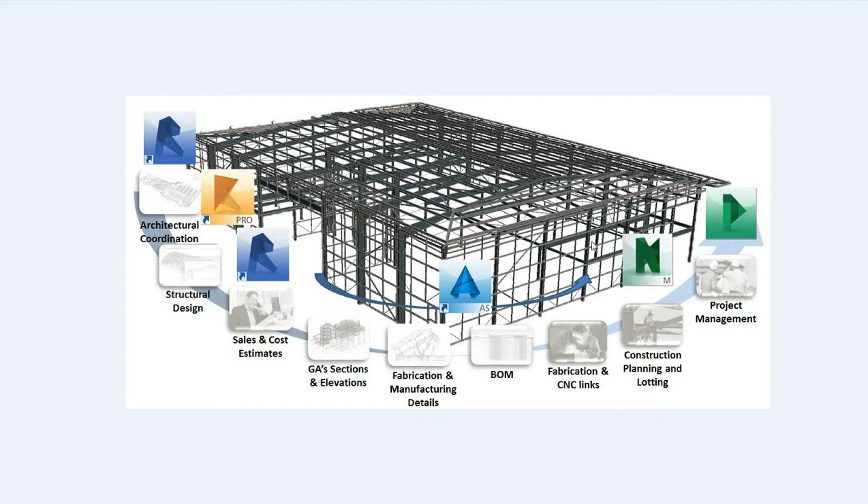If you want to go further, you even can generate a CNC file and send to your CNC machine, and let the machine create the parts for you. Next step, I will show you guys how to model in Advance Steel.

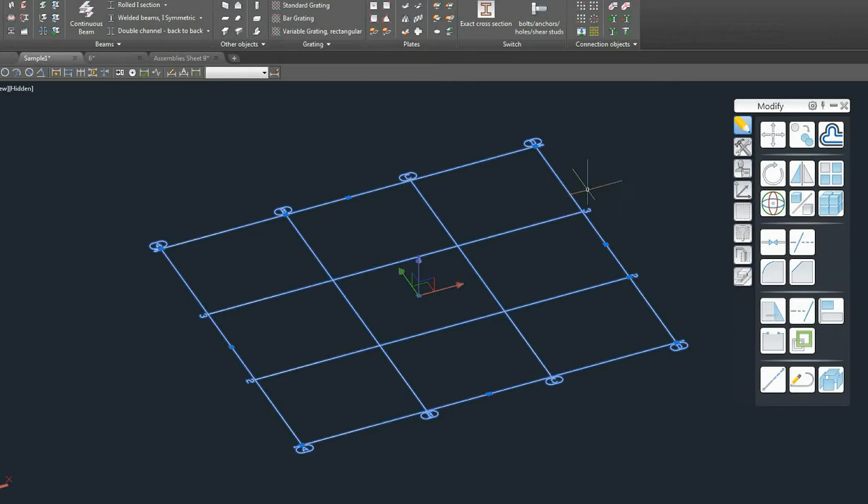At the beginning, I have to show you guys in case someone is really interested in a bayline. You can create baylines here, and of course you can change it, parametric change your bayline. Okay, it's nothing new, but I know probably it's really important to someone.

If someone is really interested, here is the model. A little cute, beautiful structure. If you zoom in, you can see there's some details, right? But how about the bar? The bar looks just like a square bar, right?

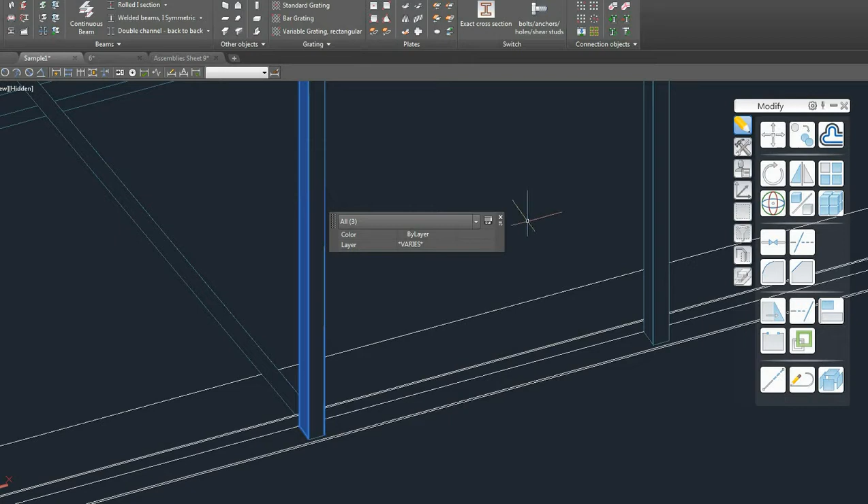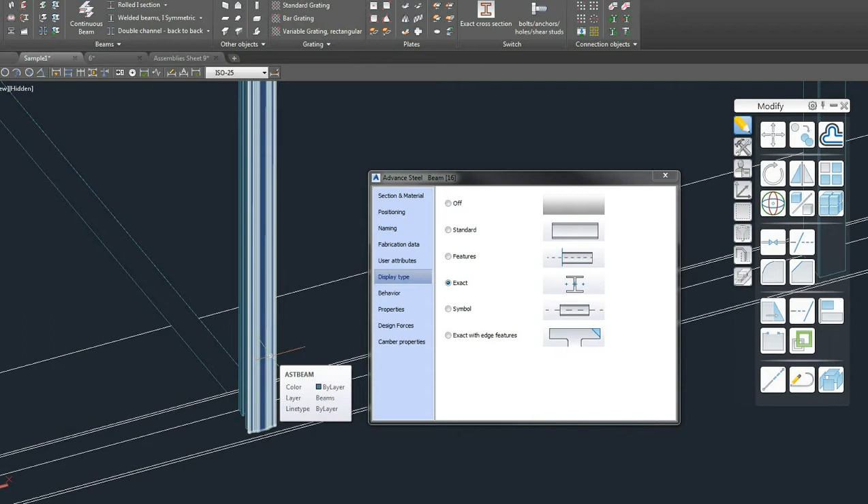Really simple, not really. If you really look into it... let's cancel it. If you really look into it, change the display type, you'll see, so it looks different, right? Also here, you'll see, oh, that's a different glazing cap. Yes, that's a real look. That's exactly the shape of the bar. So that means you have your accuracy, because the software will generate the data from the real shape of the parts, and not just simply a square.

Why do they have the simplified profile look? Because when you try to generate your shop drawing or other engineering drawings, you need a clean, neat drawing. You don't want thousands of complicated lines there. That's the reason. Next, we can take a look.

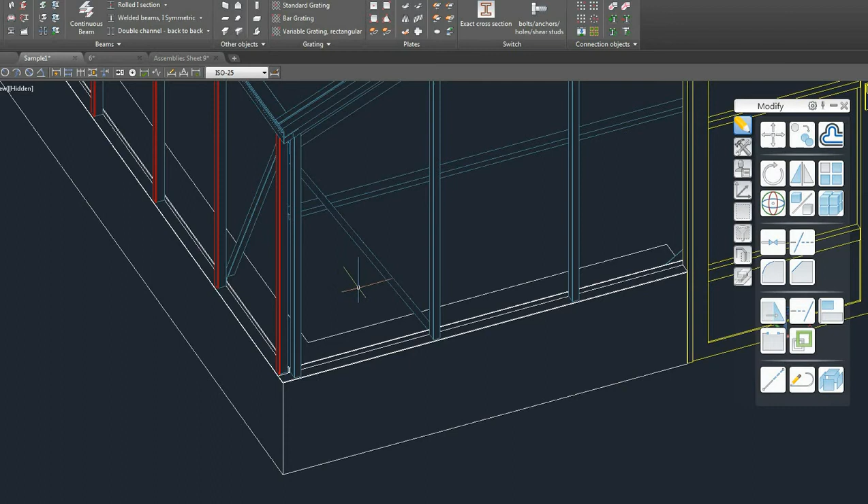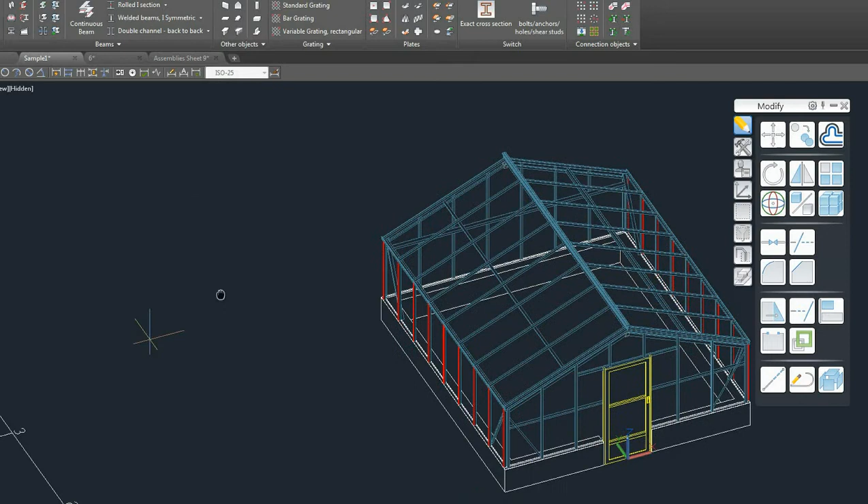How can you typically get your extrusion? You get your 3D model just same as other software. First of all, you need some 2D sketch. There's a library, a lot of big steel libraries. You also can create something by yourself, even not steel, like aluminum or wood, right? So here I just pick one and give the third dimension. Then you get your 3D solid extrusion.

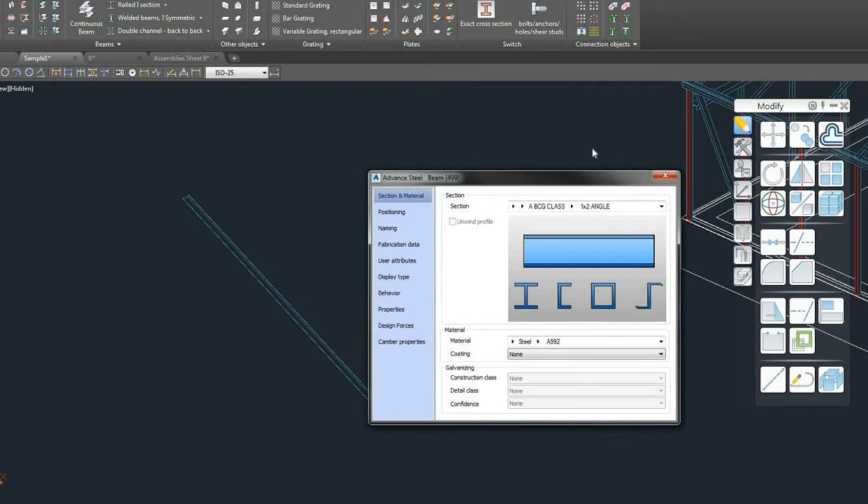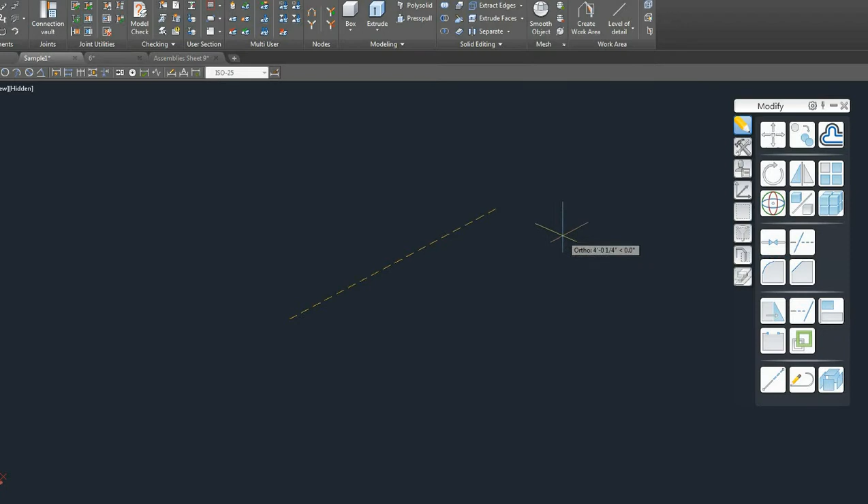Right now, I'm going to create just a gable frame. So right now I'll just give a rough idea to show you guys. That's really big, but anyway, so that's a gable frame, and you can change the section from here. So gable post size, and you can change column size, and there's lots of different settings, such as a span too small - I want bigger, like 10 feet, right?

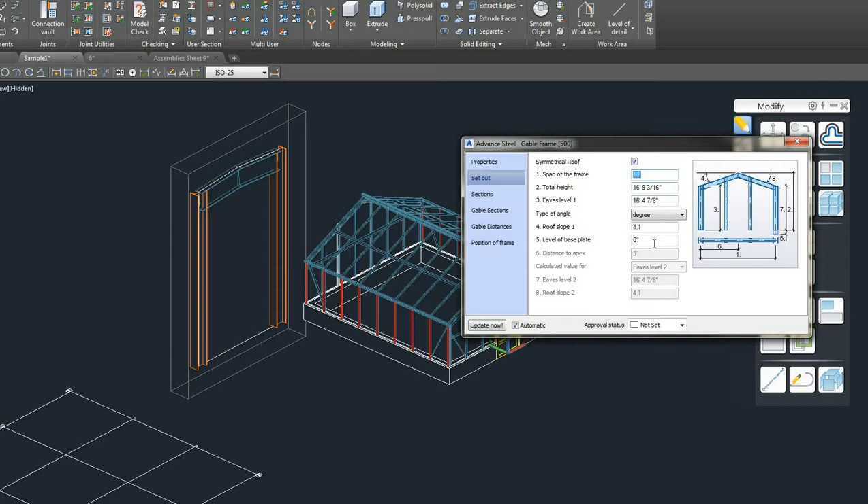You can see here it's dynamically changing. And also you can change the slope, right, the height, whatever you want to change. Right now I'm going to change our base size. So see, you can see here you get more, and here's a number you can control.

So basically it's totally parametric control. It's a smart modeling, it's not just like a vanilla AutoCAD 3D. That's a dumb 3D solid - this one is smarter.

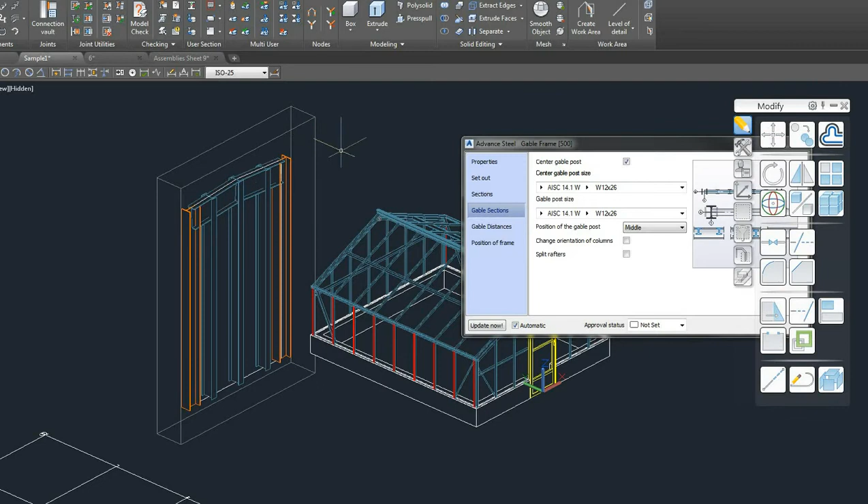After we create this cute structure here, I want to generate some documentation from the model, such as a BOM, or we can call that a cut list. That's very important for your fabrication, right?

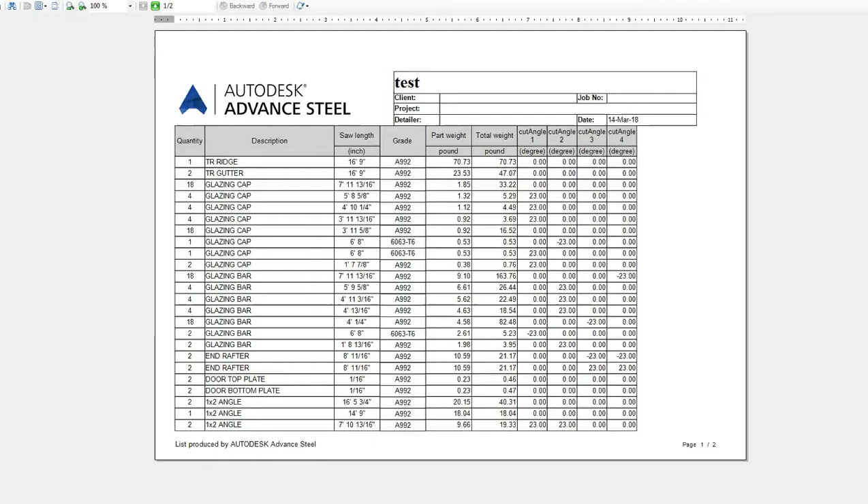So you click the BOM template, and the template comes out. Okay, here's what I create. There's a Z Cut List, and then you will get this. You can tell I put test for the header. There's also everything - basically everything in the table you can modify.

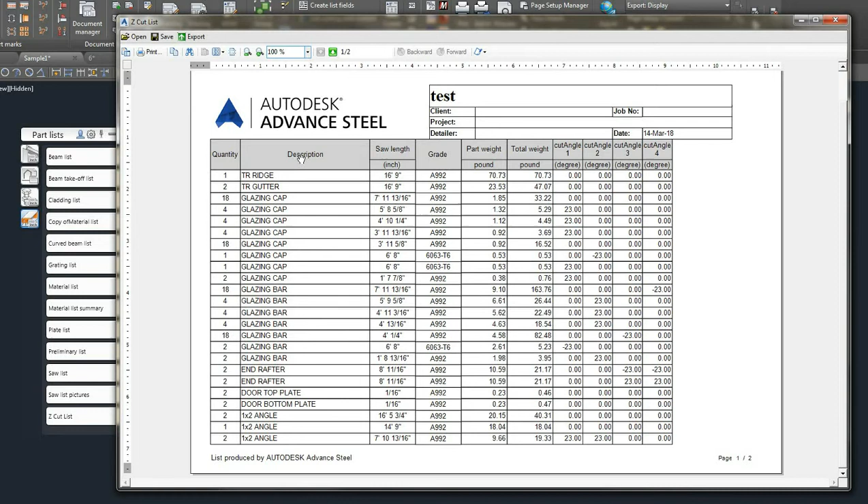Here's a column for the quantity, you get quantities. Here's a description, but you can change it to, for example, parts name, get ridge, cap, bar, whatever. There's a length, the saw length actually. Here's a grade, and here's different material I put. The 3 of them, I only change 3 to aluminum 6063 T6, and you will get different weight because of different materials. Here also cut angles. Simply just put 1, 2, 3, 4.

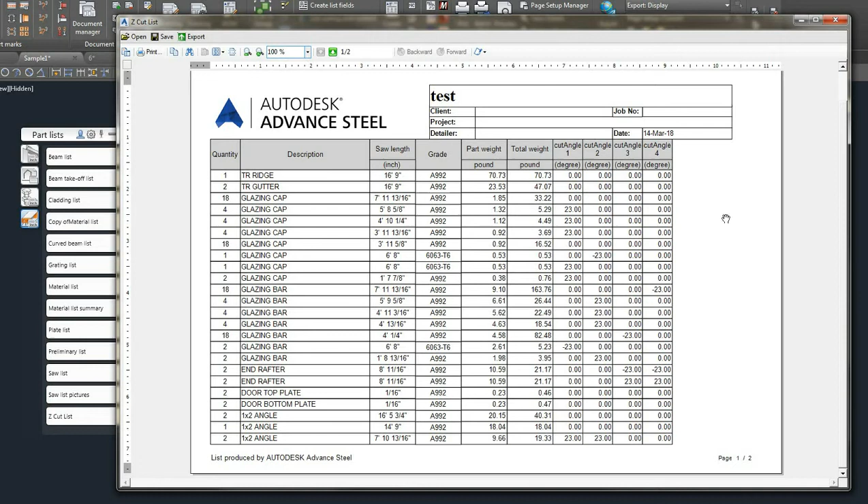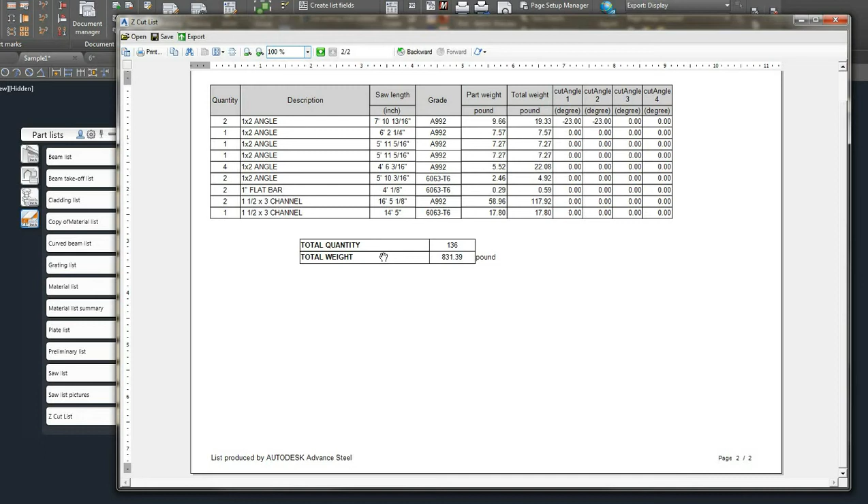Why? Because if you go 2-dimensional, you have X and Y, but you have positive and negative, so total is 4 directions. That's showing the angle difference. At the end of the table, you also have total quantity, total weight. Probably that's good information for you to consider about logistics.

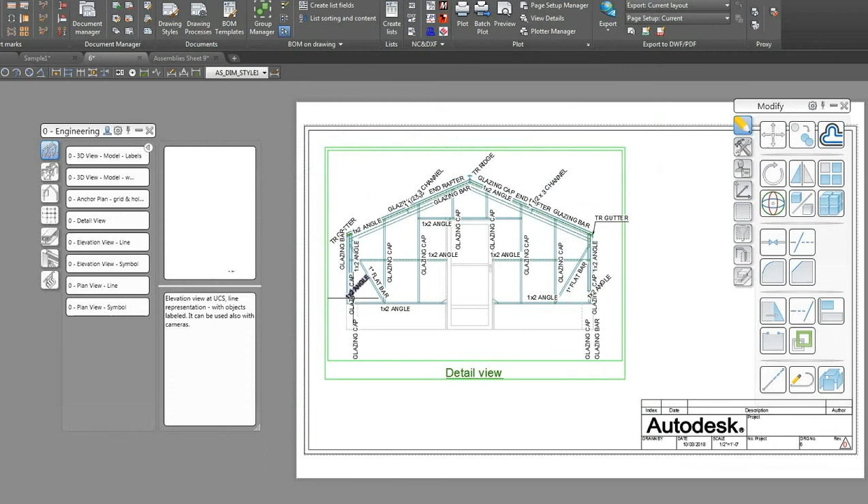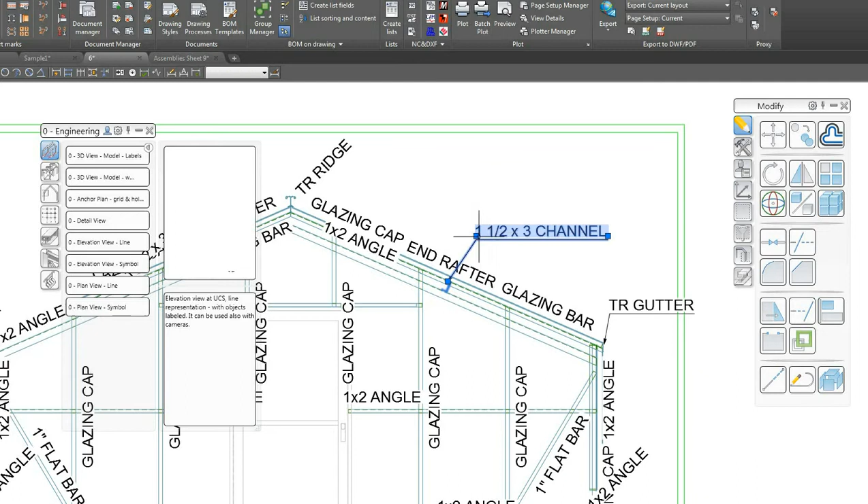You can tell they automatically give you the elevation of the gable frame, and also already some labels there, giving it the part labels, and they try to orientate it with the part. But if you don't like that orientation, such as this one, you can modify that, you can just drag it. If you need a leader, simply go there, show lines, show leaders. So right now you have your callout.

You also can predefine the template or the style of the drawing you try to generate. You probably can get a better result than this. This one just comes with the software.

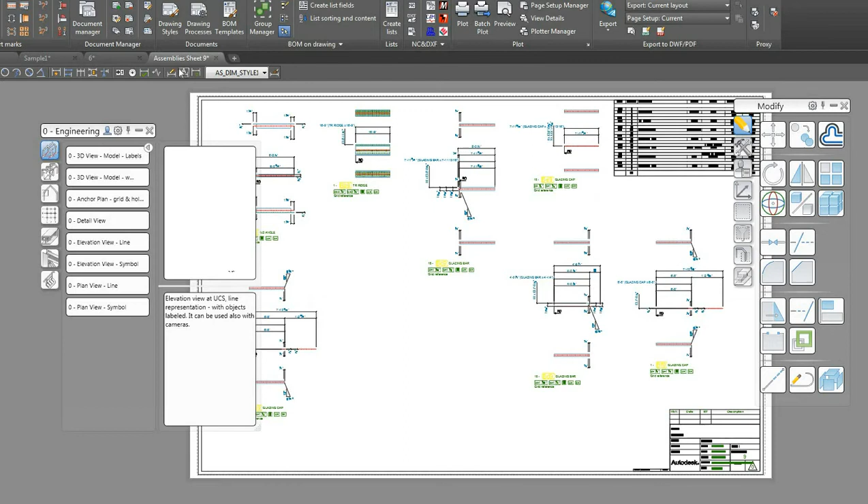You can do better. Also, there's another type of drawing, we call that assembly drawings. Basically, it gives you the whole parts, dimensions, everything automatically generated. Those dimensions are automatic, I didn't manually add them.

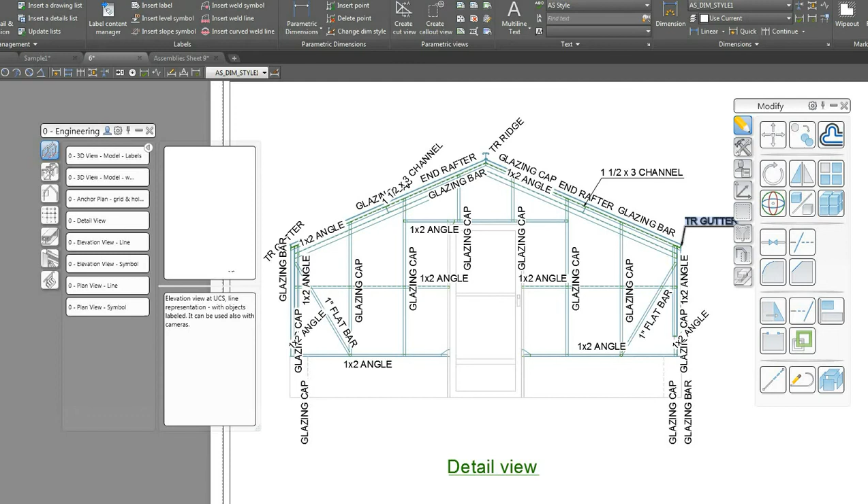It's different, like this one. If this one I want to give some dimension, I can manually add it by myself.

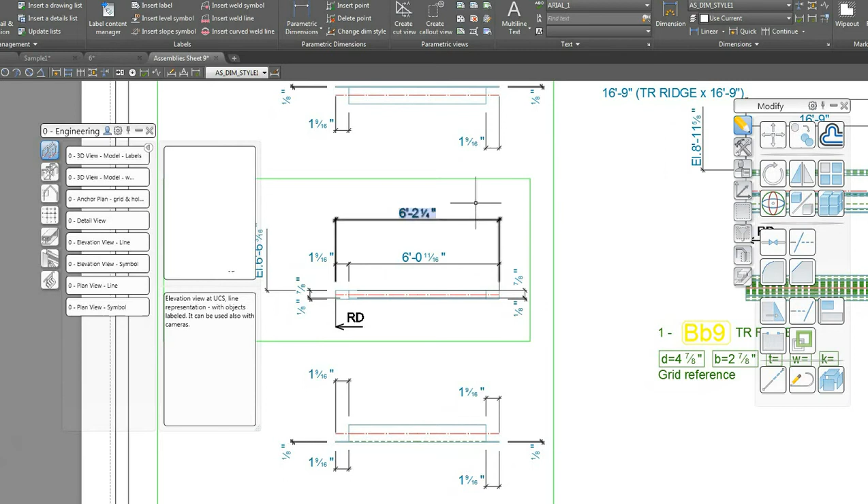Yeah, but that one is different. This one is from the style they set up. Of course, you can change the style, you can optimize the template, make some of the dimensions more meaningful. But better than none. Here also the banners.

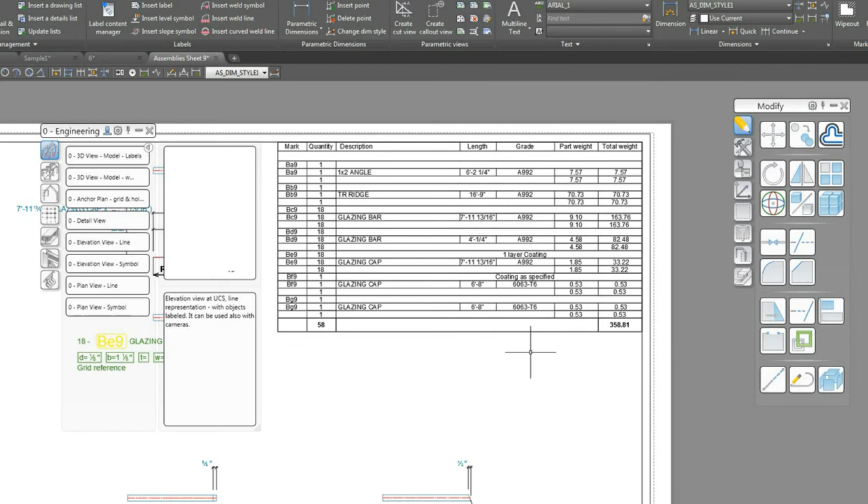They give you the BOM. It's different from the report I just generated. This one is inside of the drawing, but shows the same information, same idea. Which one do you like? The drawings with a BOM like this, or just simply a report or the cut list?

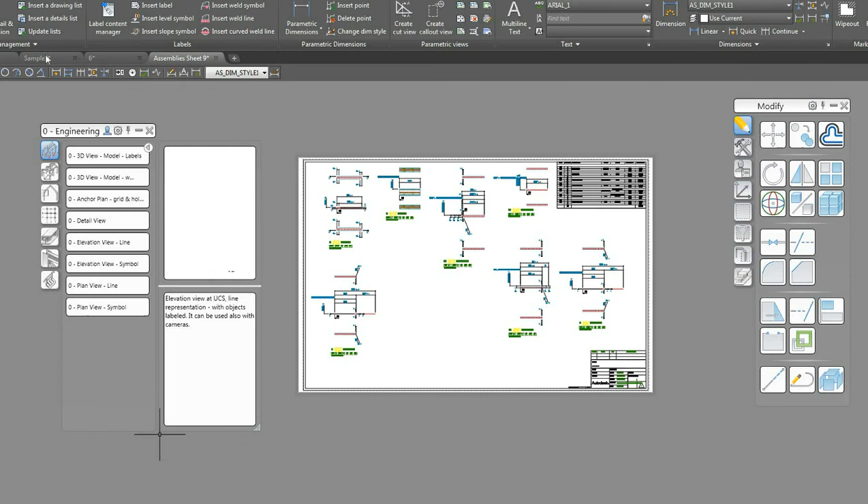It's up to you. Okay, there's lots of choice options, and so basically that's about this software. And someone may be curious if this 3D model can convert to 3D solids, just regular 3D solids. The answer is yes.

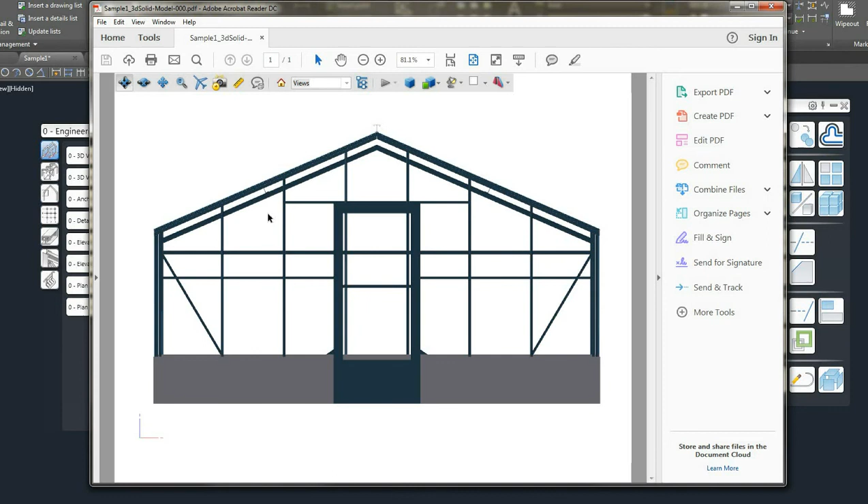Look, this one, I transferred that to 3D solids and created a 3D PDF by Bentley we use, which is just part of MicroStation. In this PDF, you can see some detail. You can send it just to your clients. You can simply drag and rotate. You can see more details.

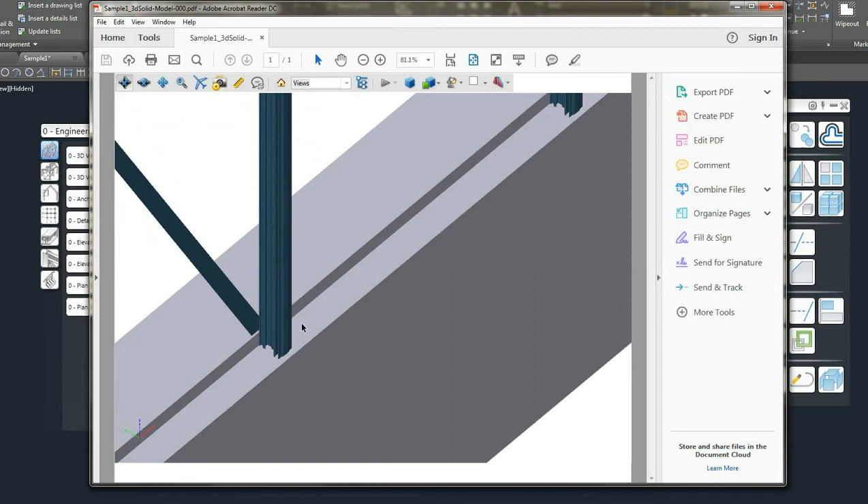It's easy to communicate with your clients or other contractors, because they don't need to install some fancy software. They just need a PDF, even the free PDF reader.

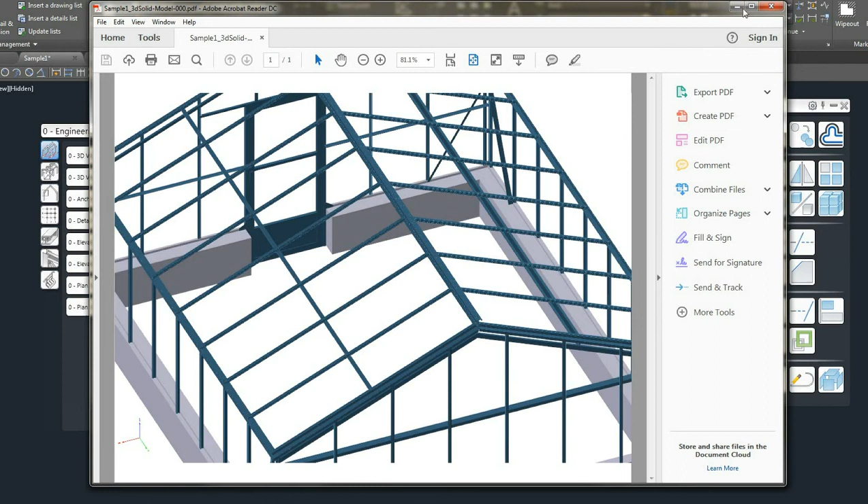So it's easy modeling, easy to model, and I believe if you have a background of using AutoCAD, that would be a really short learning curve for you.

Also, I did a research on the license fee, the price. It's much cheaper than the similar software in the market now.

And after that, I guess that's today's video. But at last but not least, I'm going to talk about some rumor about myself.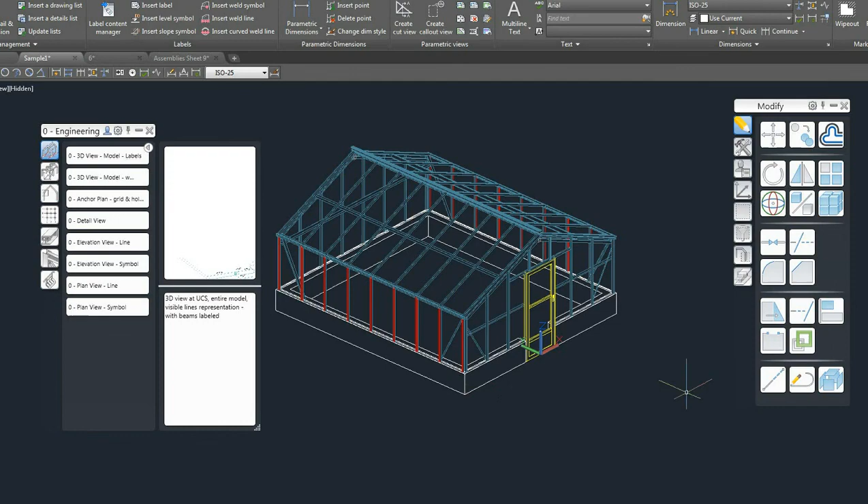They say Michael is not a well-organized person. I think that's totally not true. It's nothing true, I was surprised. What are you talking about, right? Look, if you really look closely, I'm really organized, I can find the information I want. But I understand why people think about me that way. But if you really want to use a term, I don't think it should be 'not organized'. How about 'dynamic equilibrium'? Yeah, is that the word? Dynamic equilibrium, right? It's a dynamic balance. Nothing is permanent, impermanent. The whole universe is impermanent, and that's the reason we keep going.